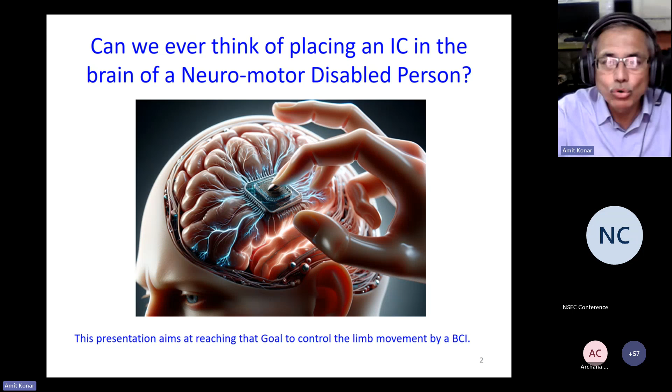So what is brain-computer interfacing? As you see, in brain-computer interface, we must have a computer and a human brain. The computer generates certain stimuli for the brain. The stimuli could be visual, or audio, or tactile, or aromatic. And the brain, on receiving the stimulus, generates some responses. The responses are electrical signals or images from the brain. Those signals or images which are responses to the audiovisual or tactile stimuli go to the computer. And the computer then tries to understand the interconnections between the stimuli generated and the actions responded by the brain in terms of signals or images.

So is there any kind of correlation between the stimuli generated and actions? That is the fundamental thing the computer has to identify. In case it can identify, then it has a lot of benefits. What are the benefits? For example, you try to make the brain do something as you wish. You can generate the corresponding stimuli because you know the stimuli and action pair. So if you want to get the right action by the brain, you'll be generating the corresponding stimuli from the computer. So this is most useful, identifying the stimuli-action pair by such a BCI arrangement, so that you can make the brain do something that you really wanted by generating appropriate stimuli.

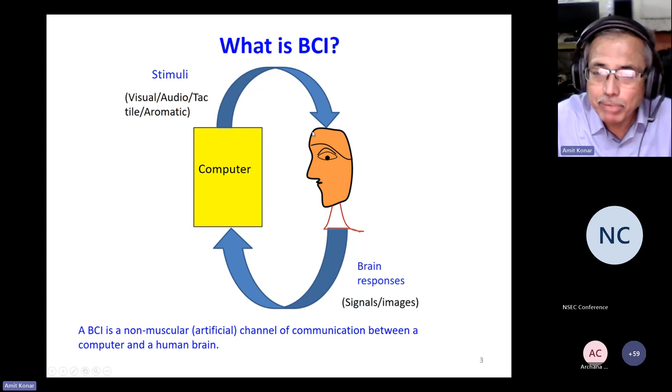Now the question is, how does the brain liberate electrical signals? When the person observes some stimuli, say visual stimuli, for example a computer screen or a blackboard where there is a certain stimulus, he will be reacting to this, and his reaction appears as a number of positive and negative charge pairs. They are called dipoles. Dipoles means positive and negative charge pairs of equal magnitude with a small gap between them. A large number of such dipoles is created in the brain at a particular region which is actually processing the stimuli.

For example, if you see a certain particular kind of stimulus, say a rising sun on a screen, then some portion of the brain, particularly in the occipital lobe, somewhat here, will be actuated. And that part of the brain will be liberating some signals.

Suppose you find on a rooftop a child playing, and there is no boundary on the rooftop, and her mother and grandmother are talking inside, but the child is very close to the edge of the building and might fall at any time, and you are at a far distance. Even if you shout, the mother and grandmother cannot see. You can watch the child at the edge of the top of the building, and he might fall at any time.

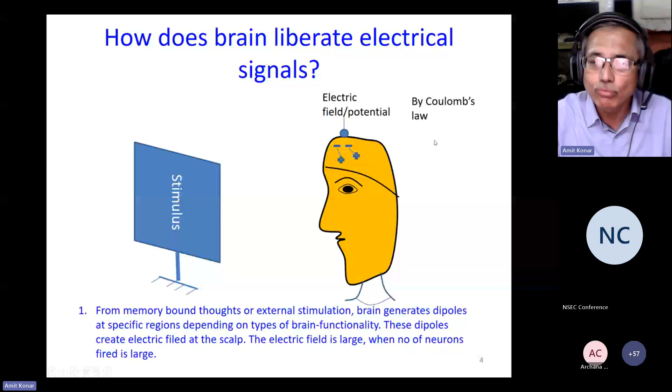So because of such dipoles, the potential at any point on the scalp will vary. If the dipole concentration varies, the potential will vary with time, and we get an electric field as well as a voltage waveform over time at any point on the scalp. An EEG acquisition device collects those signals. Electrodes are connected on the skull, and the device gets those signals, amplifies them and converts them.

After amplifying, there is a hardwired low pass filter to filter the signal between 0.1 hertz and 100 hertz and attenuate the rest, because most EEG signals are confined to 0.1 hertz to 100 hertz. So a low pass filter with an upper cutoff of 100 hertz is good enough, and we can get the signals from different channels, CH1, CH2, CH3, in a similar way.

So in an EEG machine, we acquire the signals from the skull, amplify them by a factor of 60 to 100, and apply a low pass filter with a cutoff frequency of 100 hertz on the different channels. After we get the acquired signal here, we need to add the orange marked blocks. What are the orange marked blocks?

Excluding the person. The person also looks orange here, unfortunately.

But the orange marked black blocks are band pass filtering. Then for individual cognitive tasks, we have to filter the signal in the respective bands. For example, someone is sleeping. To identify the sleep kind of activity, for deep sleep or mild sleep, all those kind of things, you have to determine at a certain frequency band, at very low frequency, 0.3 hertz to say

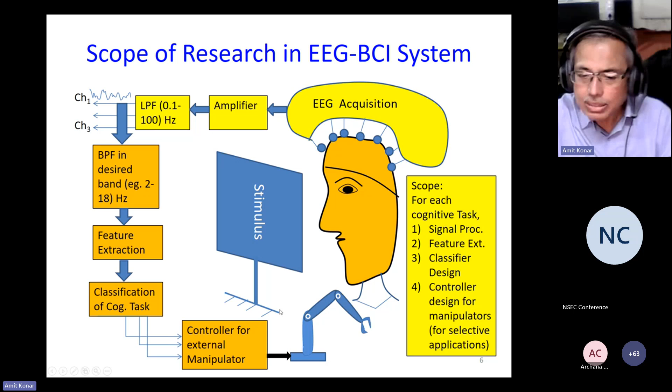And then sometimes we can feed it to a robot arm or a controller. So based on the signal amplitude, or based on the signal generation, we can feed it to a robot to do the necessary task. So this is an actuator or a manipulator connected with the control signal to do the necessary task for the robot. So the scope of the research here is on signal processing, like filtering and feature extraction. So first is signal processing, second is feature extraction, third is classifier design, and lastly the robot controller design. These are the scope of research for the present problem.

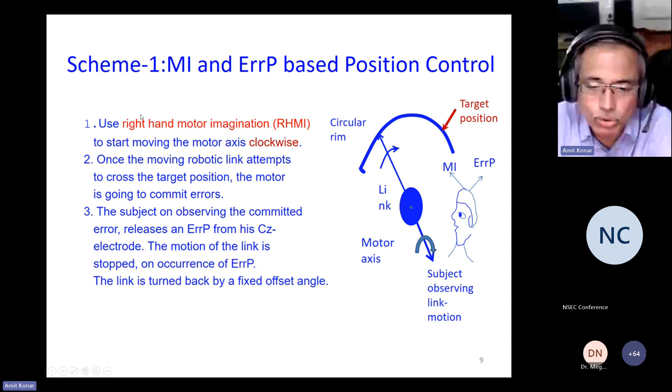Because if the motor is somewhat here, it has to turn back in the opposite direction so as to align it with the red line. So the motor first moves forward, then it crosses the target point. It is identified that it has crossed the target point. It is turning back, meaning opposite direction. It is moving from here to the red line, and effectively you then stop the motor. So the steady state error in this case will be 0.

Basically, the program is very simple. You just check whether motor imagery is detected in the program. If motor imagery appears, that means the person thought of moving his hand, so start the motor. If motor imagery did not appear, that means the person did not move his hand, so wait in a loop until the person thinks of moving his hand. And when the person really moved his hand or thought of moving the hand, then motor imagery will be detected. Then we just command the motor to start.

As the motor started, at one time point, it will cross the target point. As it crosses the target point, ERRP will occur. So we look for ERRP to be detected. If ERRP is detected, then error occurred, so we turn the motor back by a fixed offset and stop. If no ERRP, then we continue looping through. So this is the idea how it works.

Second is right hand motor imagination. The person is given a command to move his right hand for 3 seconds. So in that case, when the person thinks of moving his right hand by observing the screen, he is waiting. On the screen, one motor will move by program, and when the motor crosses the target point, the person will generate the ERRP. So the person is waiting to see the robot arm cross the target position on a software video, and then he will be liberating the ERRP signal after 2 seconds.

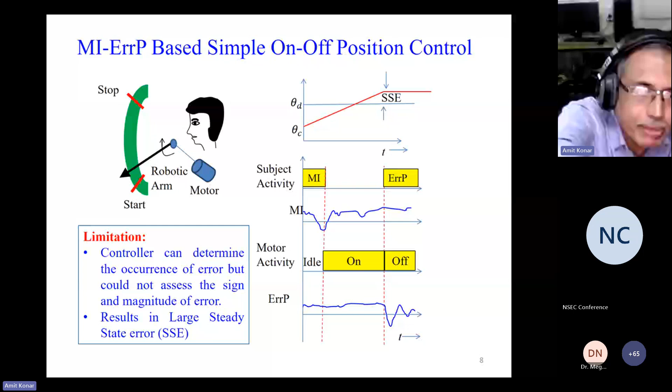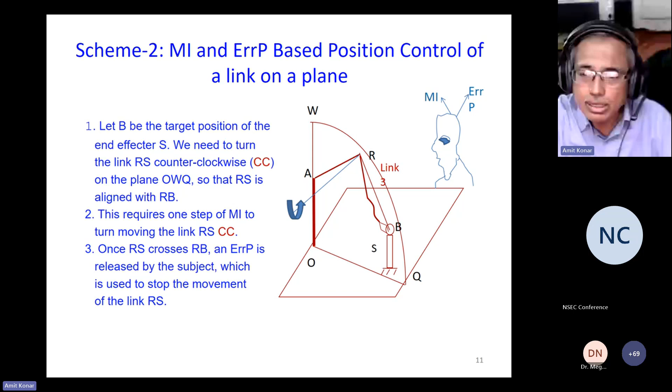Then there are 3 links for the robot, as you see. This is link 1, this is link 2, an entire thing which actually has 3 links, but we just use it as a single link because the remaining 2 links we do not trigger. We just use link 1, link 2, and link 3, and that too in a fixed order.

Whenever we developed this part, in one presentation, this was done by Saugat Bhattacharyya, who is also your presenter right now. I don't know whether he is presenting this, but he is a speaker in this forum, and he actually did his PhD under my guidance, along with another professor who expired recently, from Jadavpur University. So basically, he is now in Ireland, and he did his PhD work on this particular problem.

So this is also published in an IEEE transaction. I also asked Boishali to send this paper also, Saugat's paper.

So basically, what Saugat did, he commanded the robotic links 1, 2, and 3 to trigger in a fixed order, because at that time we did not know how to communicate to the robot which link to trigger. So first we tried with link 1, then if the error is not 0, we tried with link 2, and then link 3, in that fixed order.

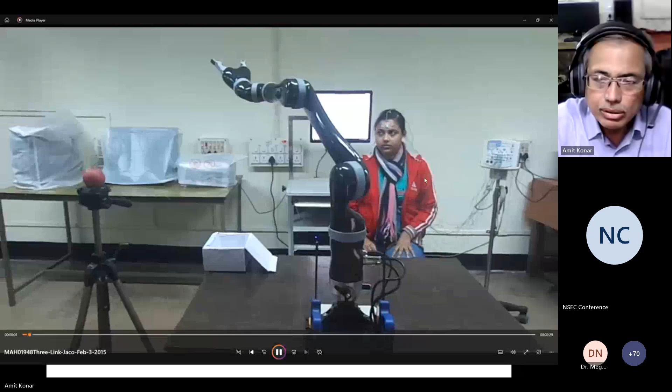This is one video where there is a ball and there is a box. The person will think of just moving his left hand or right hand, left hand to trigger one robotic motor clockwise and right hand to trigger the robotic motor counterclockwise. These are EEG electrodes placed on the scalp of the subject. They look like metal buttons. These are two reference electrodes placed at the two ears.

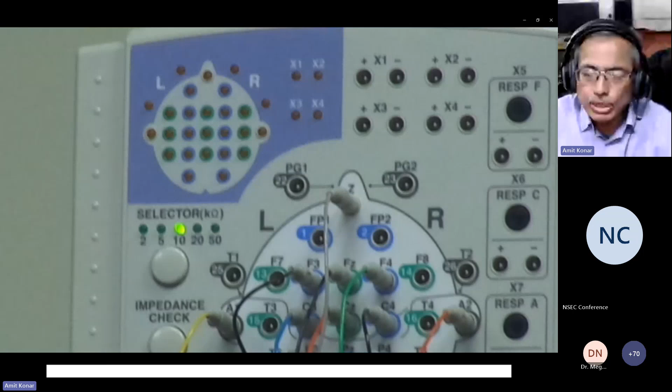The signals are captured from the brain and go to the EEG system, where there are an EEG amplifier and an AD converter, analog to digital converter. The converted signal is connected to a computer to generate the control command for the robot. So there are two computers, one connected with the EEG machine and another connected to the robot arm, and the computer-to-computer communication is done by wired means.

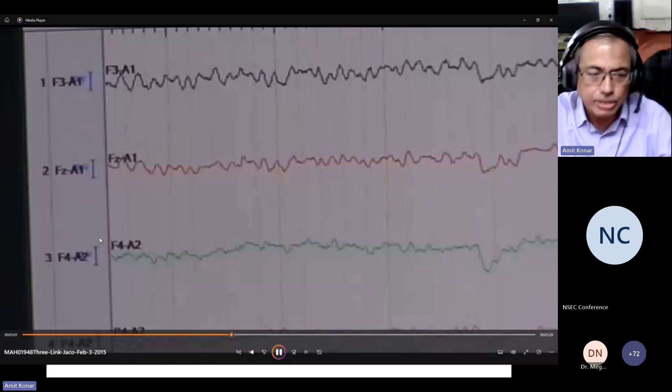These are the brain signals acquired by the EEG collecting device. The electrodes are shown here. Corresponding channel signals are activated as you find.

Now the operation starts. The person will think of moving this link towards the plane of the ball by thinking of right hand movement. She's just thinking right hand movement, it moved. But it crossed the target plane, so an error was found, and she commanded the robot arm to turn back and reach this link by link 2.

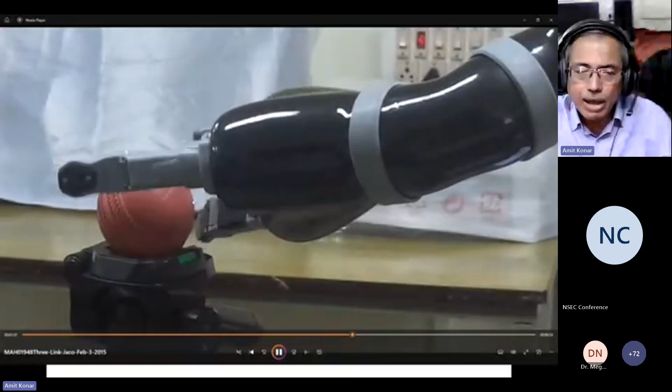And now she wanted to make the gripper horizontal. Unfortunately, it is not horizontal, so she again corrects it by error-related potential. Now she wants to move her right hand twice, that means gripping.

Now she wants to move her left hand twice, which means to move this robot arm by 45 degrees, but it has more than 45 degrees. So error occurred. She wanted to bring it down.

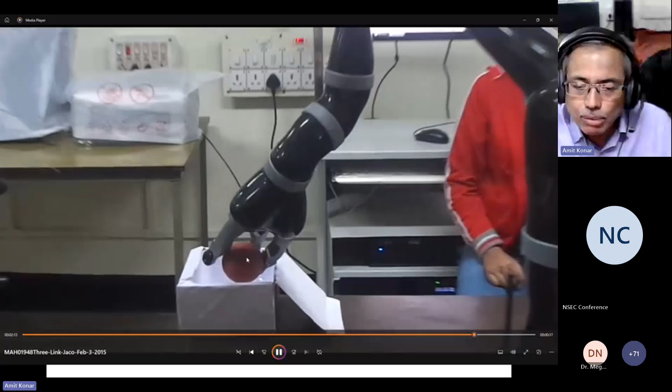Now she wants the robotic link 1 to move towards the plane of the box. It moved, but there was an error, corrected. Now she wants to bring this link down, but it is going out of the plane of the box. So there is an error, it is corrected.

Now she thinks of moving her left hand twice, which means releasing the ball. So the ball is released. In this manner, the robotic arm, which is an assistive device, can be controlled by the person's thoughts only.

Now I show you another video. Can you see the video? Hello professor, yes sir, can you see the video? Yes, sir. Okay, now I show you the second video.

Whenever we developed this, in Saugat's paper, the reviewer said if you have more links it will not work fine, and their idea was correct. Up to 3 links it is giving very good results. When you increase the number of links, the results are poorer, because when the robot makes a small error, it cannot be corrected online. Just see the video for 4 links.

So the same robot is configured in a different fashion. This is another student, she did her PhD from ISI and her master's with us at Jadavpur University. She is Nehalika. The previous student was Reshma, she is now a professor in the USA.

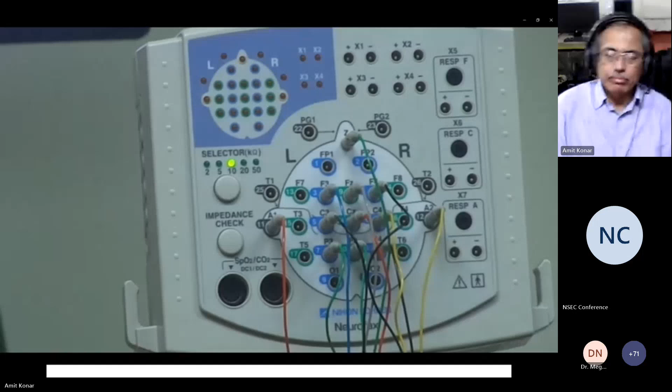So this is the brain. You can see the brain activation by colored patch from the back side. Here also the person needs to pick up the ball by the robotic arm and transfer it to the box, but she uses 4 links: 1, 2, this 3, and here 4.

See, there is an error. As error occurred, correction will be difficult in a later stage. She has to plan which link to fire, that is done by some LEDs mounted on each link. I will discuss this later, how a link can be triggered separately.

So the person is simply thinking to move her right hand or left hand, and whenever she finds the robot committing an error, she will be liberating the ERRP signal. Using this motor imagery and ERRP signal, the entire operation is carried out.

See, it has moved far away from the box, but it has to go to the box because the initial error was high, so the error continued. That is the limitation when you increase a large number of links.

It is trying to correct it later, but the accumulated error is more. Now it will drop the ball, and there is still a high risk the ball could go out, but fortunately it falls inside the box. So this is how it is done for 4 links.

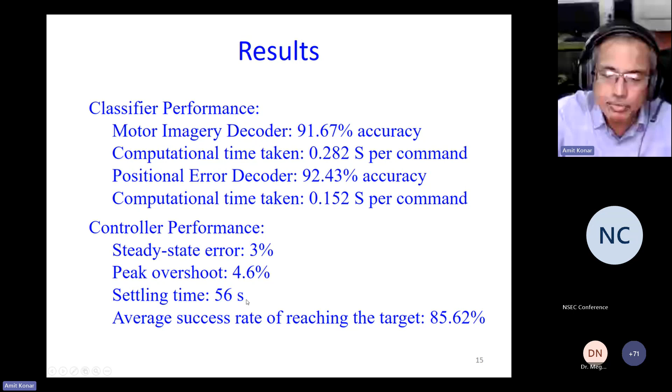We experimented with different features for motor imagery as well as ERRP signals and different classifiers, and got different training times and average classification accuracies. We found that if you use Hzorth parameters and power spectral density with an SVM classifier, motor imagery classification is good. Training time is 8 minutes and classification accuracy is 97.2%. That is the best one.

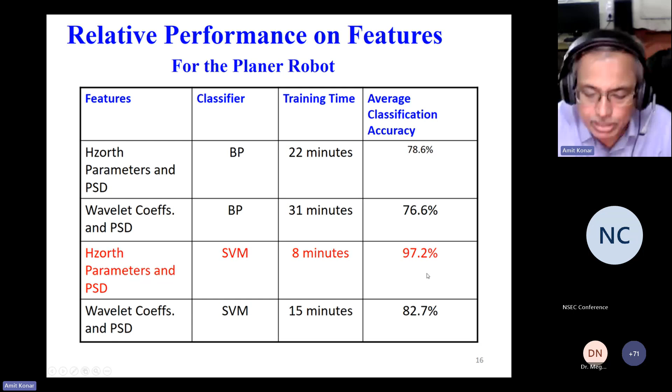Additional improvements were made in two subsequent papers after Swagat completed his PhD. Arnob Rakshit, another person, completed his work, and he is now doing postdoctoral research in United Kingdom. He is in Kolkata for a few days.

What he did was develop an automatic method for link selection. Previously, it was a fixed order link selection in Swagat's method. Arnob did automatic link selection by placing electrodes, and as shown in the next slide, placing LEDs at different links that can blink with different frequencies: 8 hertz, 10 hertz, and 12 hertz.

When an LED is blinking at 8 hertz and the subject wants to control that link, he simply looks at that link. This elicits a steady state visual evoked potential from the brain, from the occipital lobe of the person. That means the 8 hertz signal, at which the LED is flickering, will appear from the occipital lobe of the subject.

If the subject looks at a link where the LED is glowing at 10 hertz, he will elicit a 10 hertz signal. So the person simply has to look at the right link where a particular LED is flickering, and that signal will come up from the brain, from the occipital lobe. Then by processing, the BCI system will learn which link the subject wants to address, that is, which link the subject wants to control.

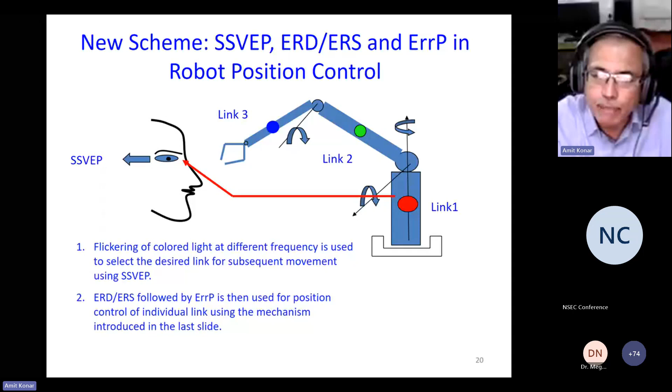This is the new achievement that Arnob made after Swagat completed his PhD. Additionally, the steady state error was decreased by allowing the link to move around the target point multiple times. Each time the link crosses the target point, the speed is reduced to half its previous speed.

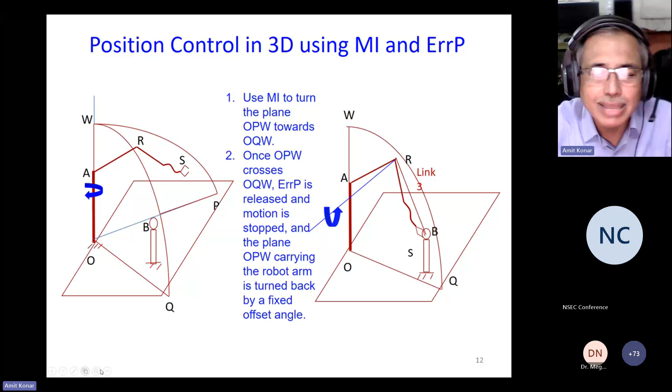Suppose initially, the first time the target is crossed by the robot arm, the speed was high. As it crosses the target, the speed is reduced to half, and the robot is commanded to turn back. As it turns back and again crosses the target position, the speed is reduced to half again and it moves forward. Each time the robotic link OPW crosses the target plane OQW, the speed halves, and gradually the robotic link OPW becomes exactly aligned to OQW, with steady state error being zero. That is the advantage.

So Arnob has done two interesting things: one is the reduction in steady state error, and the other is selection of the individual link whenever required. This is published in a well cited work in an IEEE transaction.

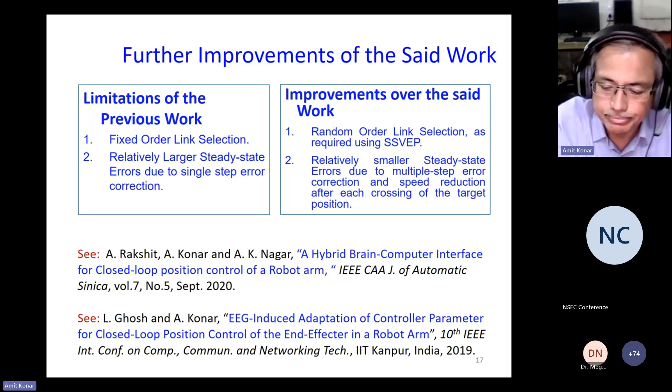Now, Lidia, who is assisting me and sitting beside me, is doing some interesting work. She identified that the fundamental problem in the previous two works is the need to engage the person all the time during the control process. The person has to pay attention throughout the control process. But is it possible to make the person less attentive throughout the control process?

Is it not possible that the person can only identify the target thing he wants to bring towards his mouth during a dinner table or during breakfast? So at the breakfast table, there are a number of fruit juices, and suppose this person wants the orange juice instead of the others. The person simply looks at the orange juice, and the robot arm can automatically reach it.

How is this possible? Lidia says it is possible to break the problem into two halves. In the first half, you identify the XYZ coordinate of the glass the person wants to sip, such as the orange juice, and the person may be left free. The rest of the control task, of the robot reaching there and bringing it towards the subject's mouth, is an open problem that can be handled by a traditional multi-loop controller.

So the task of the person is just to make the robotic system understand the XYZ coordinate of the target point where the robotic link has to reach. That is the first strategy. And in that case, the cognitive load of the subject, which was heavier earlier because the subject has to be attentive throughout the control process, now is reduced significantly.

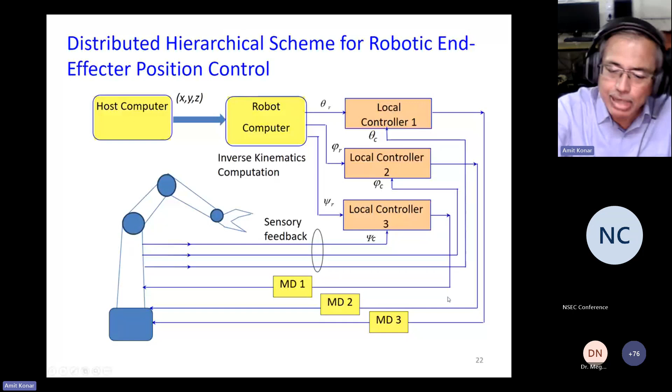Now it details the control algorithm. In this work, your coordinator Anuradha ma'am is also engaged. Boishali ma'am, who is my assistant here right now, is being supervised by Anuradha ma'am and myself in her PhD thesis. She has joined for 1 year, and during this time she has developed the control loop and stability. She uses a different type of fuzzy control. The one I discussed but did not name is called Mamdani type fuzzy control. But here she used Takagi-Sugeno type fuzzy control, which is more sophisticated. Because of time, I could not discuss Takagi-Sugeno type fuzzy control.

Here she is using error and error derivative. There are 2 loops, as you find. One is the position loop outside, and the other is the inner loop controlling the speed of the robot. The position loop is for an individual link of the robot arm, say the theta r link, the first link for local controller 1. A similar 2-loop system is there for the other 2 angles. So for link 1, what is done? This is a Takagi-Sugeno controller that determines the armature voltage of the robot, which in turn corresponds to the actual torque of the robot.

But there is a torque variation because the robotic arm may pick up any glass. When a big glass is there, torque is different; a small glass, torque is different. Because of the torque variation, you need to understand, when the pickup is done, how much torque has to be generated. So the robot speed and armature voltage are to be adjusted. That is done by the Takagi-Sugeno fuzzy controller. And after the armature voltage or torque is produced, the inner loop controls the speed of the robot arm by tacho feedback.

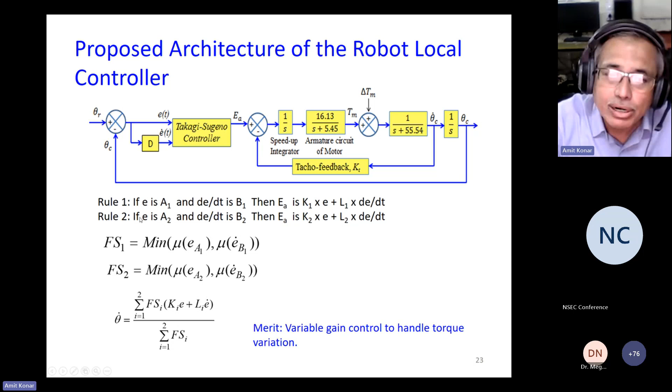So during experimental setups, you will pick up different glasses with completely filled fruit juice or partial fruit juice, and then can automatically generate the right torque by experimentally setting K1, L1, K2, L2 using a special type of learning automaton which is connected with the Takagi-Sugeno controller.

And after that, she did the stability analysis of this by the Lyapunov method and also by the root locus technique. And she found that the system is stable when certain parameters like K and L satisfy this range: 0 to 19 for K, and L must be greater than K, but if K is, say, 5, L must be greater than 5 and less than 1134.

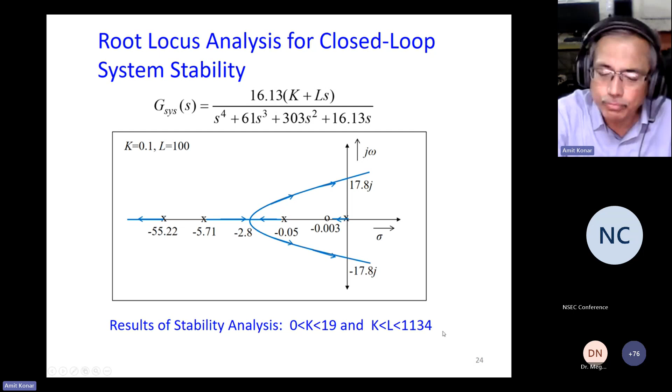Now let us conclude the session. So in this session, we developed one method for translating human thoughts into action by artificial means, and that is very challenging work. It provides an opportunity to develop any kind of position control scheme by your thoughts. EEG is a very interesting device for real-time control from brain signals because you can get the signals in real time, unlike MRI and other signals where you don't get the signal in real time.

EEG is very cheap but provides a very important time-valued signal. So you can easily use those signals for any BCI experiments wherever you require a very good temporal response. But EEG is poor in spatial response. If you want to identify what the brain is doing over space, then EEG is not so good. In that case, you can use fMRI, functional magnetic resonance imaging, or its low version, functional near infrared spectroscopy, where infrared imaging is used, which is a relatively low cost device.

Now, motor imagery and error-related potential signals are used for position control of the robot arm. This is new. ErrP-based position control had not been done much when Swagat started the work. But now most people use MI and ErrP or MI and P300 to control position for a robot arm. Previously, we did fixed order position control, where you needed to control first link 1, then link 2, then link 3 in fixed order because you did not know which link to communicate.